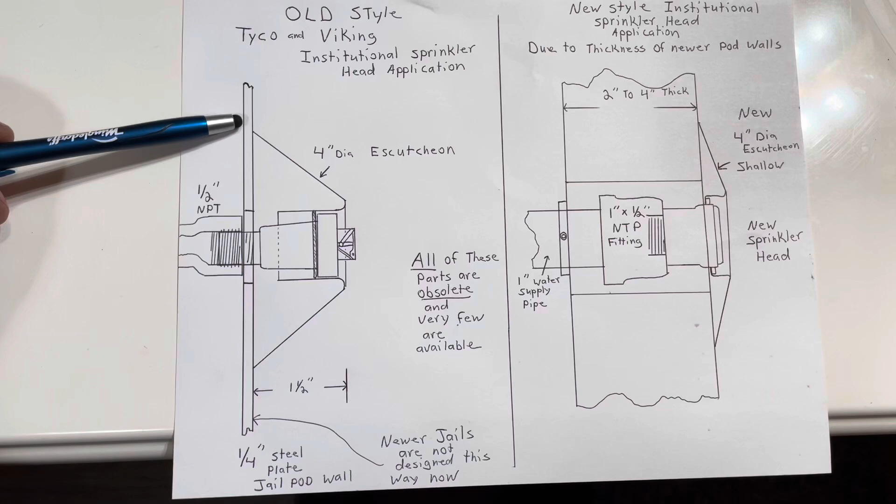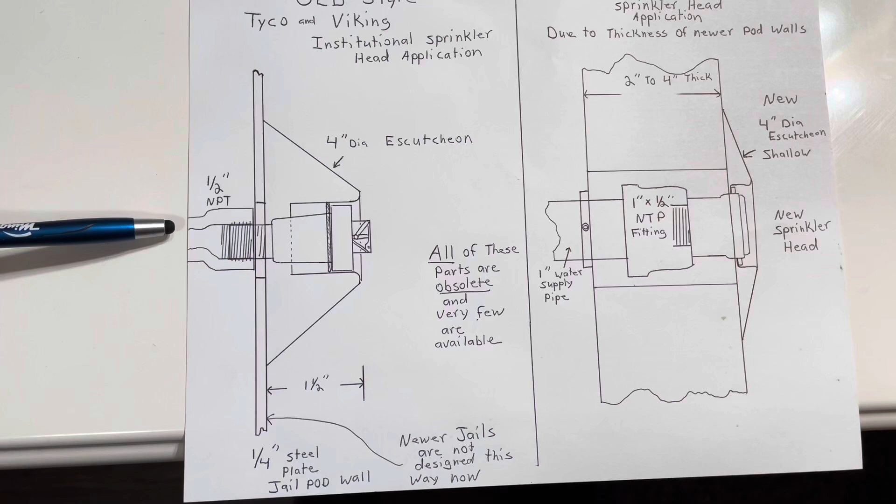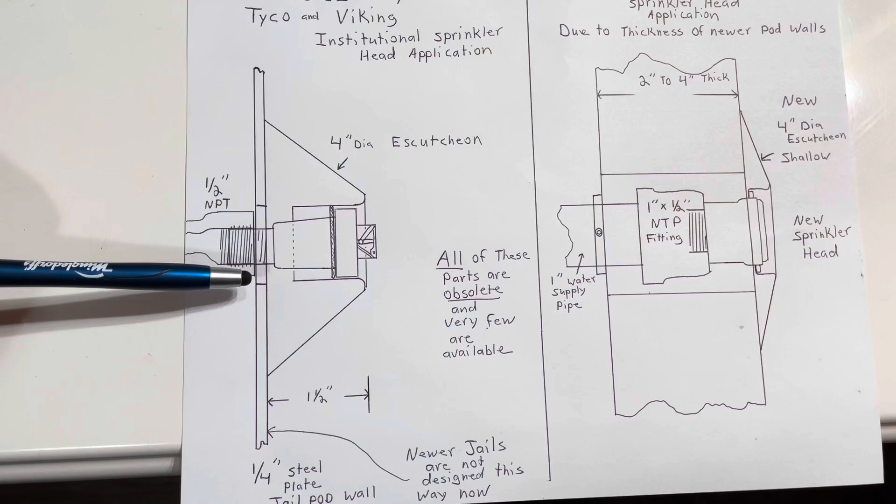So this is the old style, a drawing. The jail cells that I work in have a 1/4 inch thick steel plate, which is ribbed and solid. The 1 inch supply comes in, then goes down to a 1/2 inch national pipe thread, which is flush with the exterior of the wall. And then they all have the sprinkler head and the 4 inch escutcheon, which sticks out 1.5 inches from the wall.

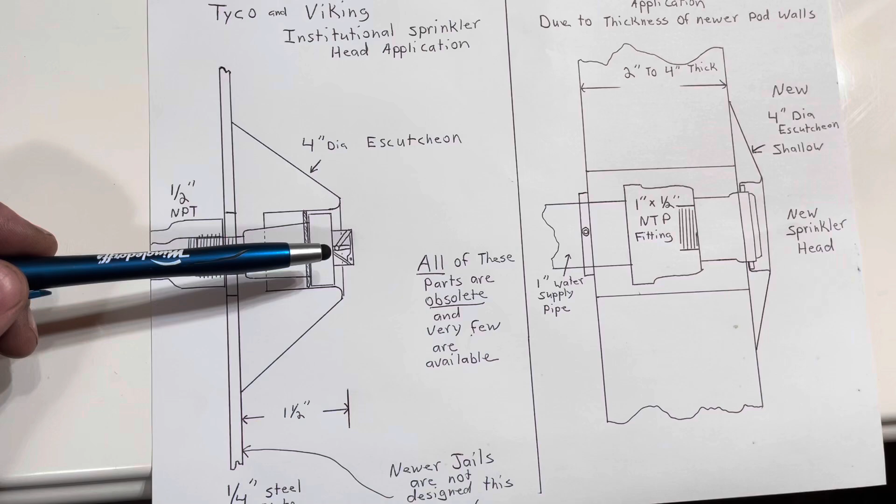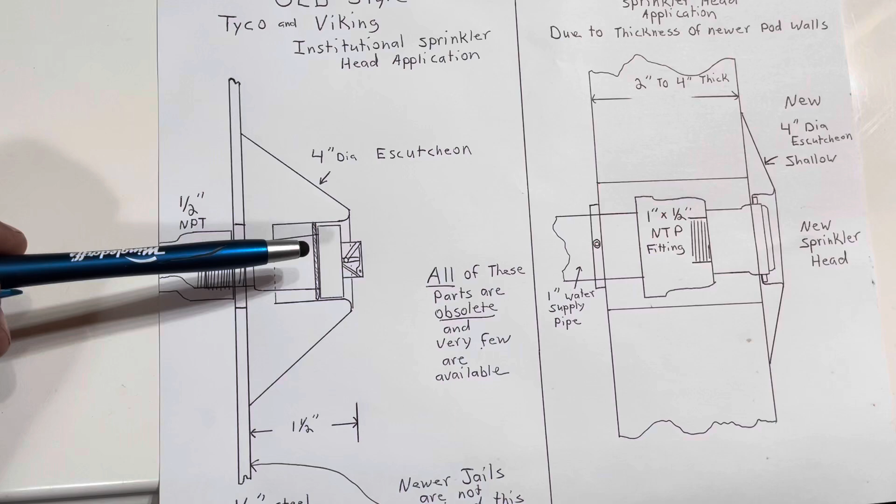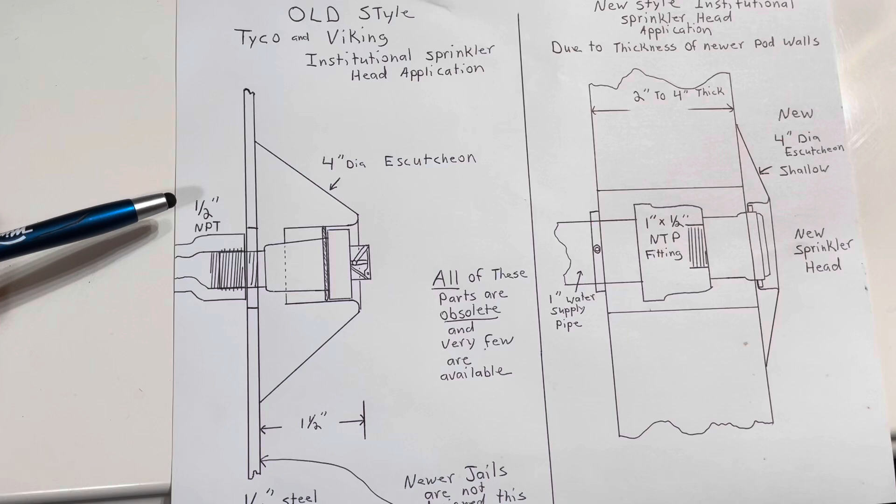So if an inmate busts this sprinkler head and it goes off, our protocol is we shut the water off, back flush the water, take the old sprinkler head off, and put a cap on it temporarily, and then render that cell under maintenance, and no inmates can stay in it until we get a new sprinkler head put in.

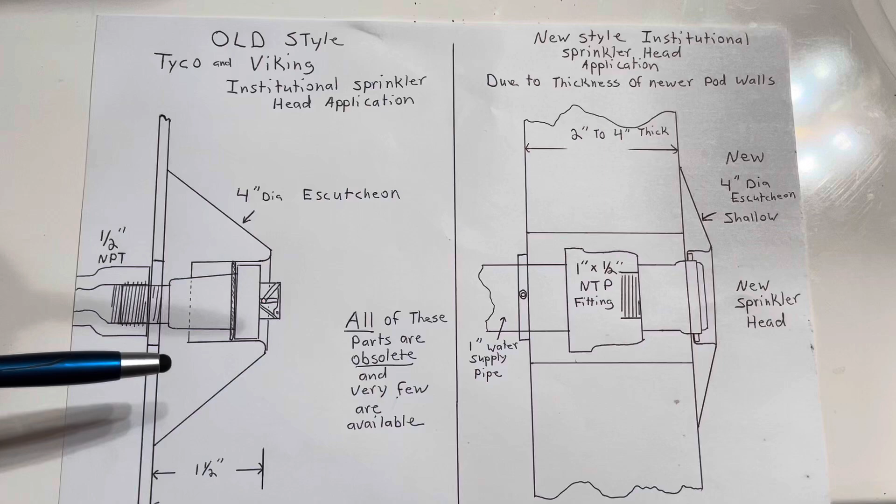The problem is all of the new sprinkler heads are designed differently, and they don't even sell these anymore. There are very few places that even have any on the shelf. I haven't been able to find any lately. So anyway, this is the new one, and the design is for a 2 inch to 4 inch thickness of wall.

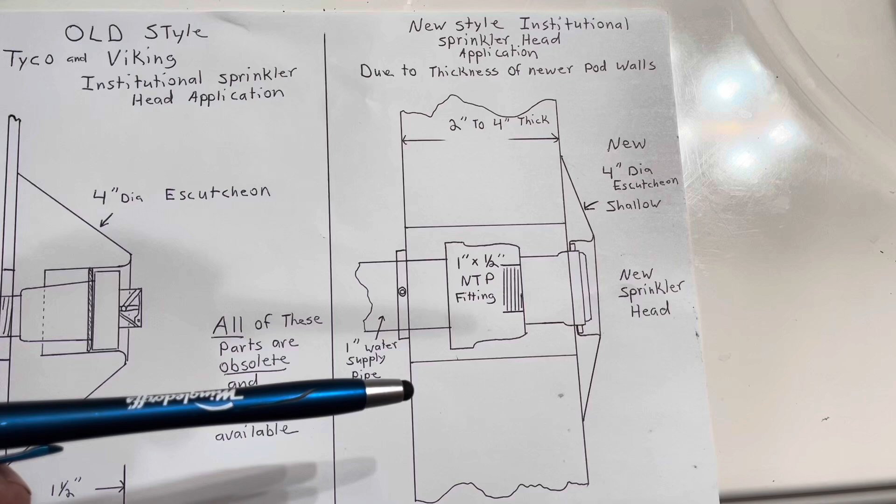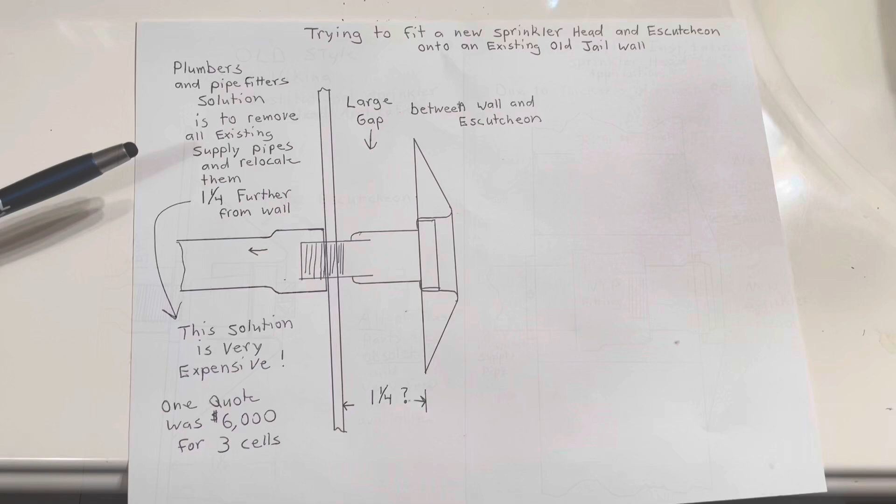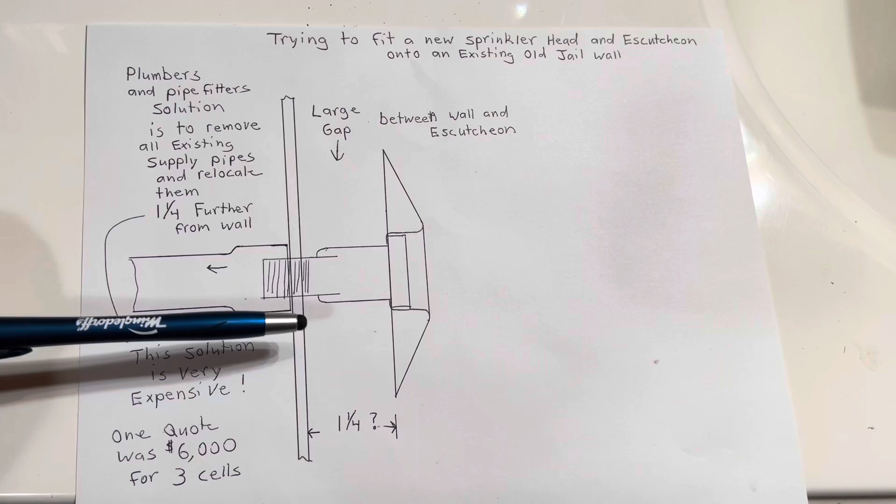When you try to put the new style sprinkler head and escutcheon on an existing wall like this right here, you end up with a 1.25 inch gap between the back side of the escutcheon and the wall, which I guess they call a hanging hazard. They don't want an inmate to put a rope behind it and hang themselves. So that's not acceptable at all.

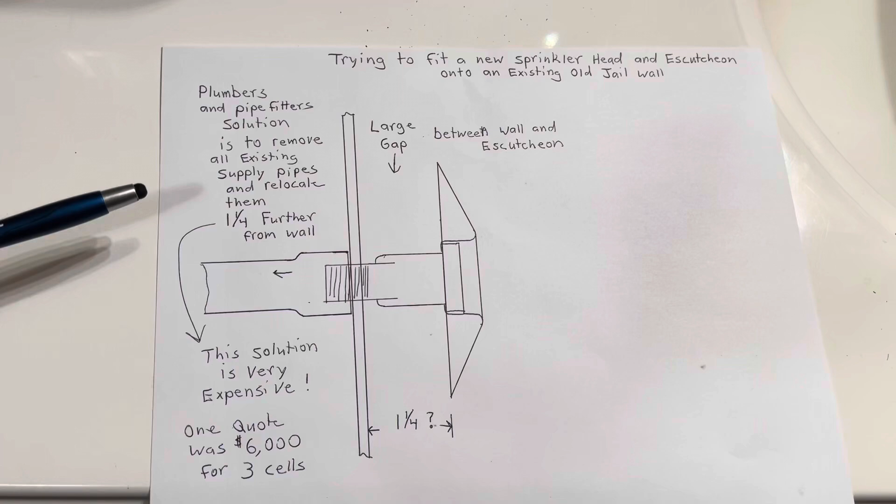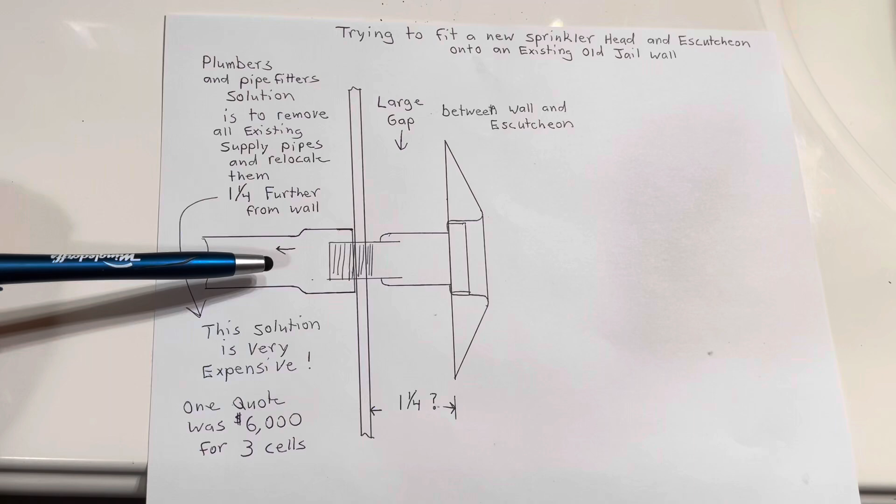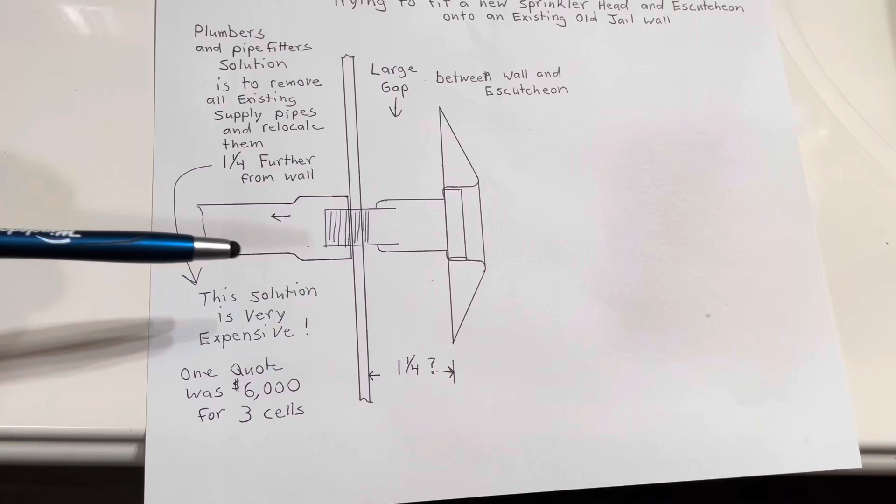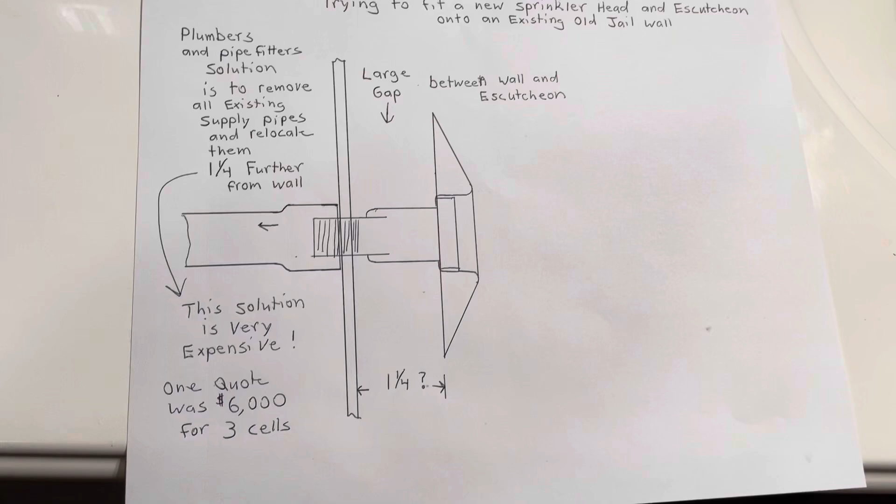The solution that plumbers, pipe fitters and even sprinkler head inspectors have given me would be to remove all of this existing piping and move it back 1.25 inches. They gave me a quote of $6,000 for three jail cells. There are going to be a lot more that we'll have to do in the future. So it's an astronomical amount of money to fix this so the new escutcheons fit flush against the wall. Big problem. And so I have found a very, very inexpensive solution that I will show you guys.

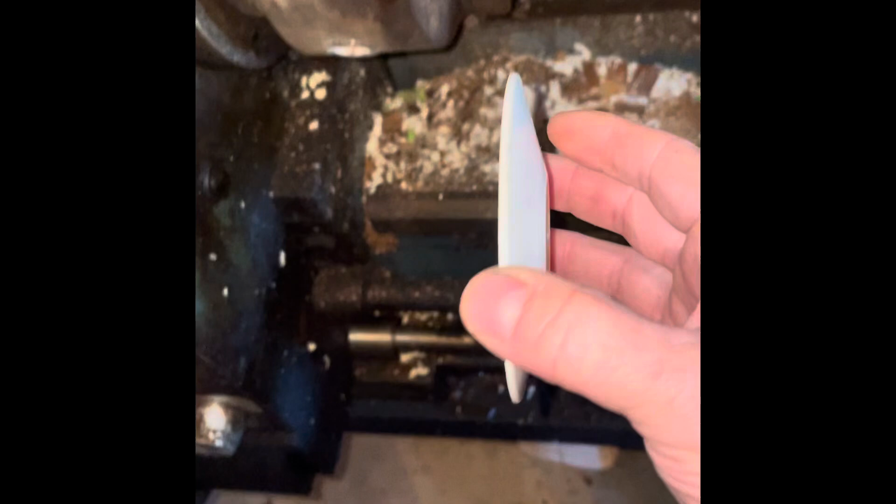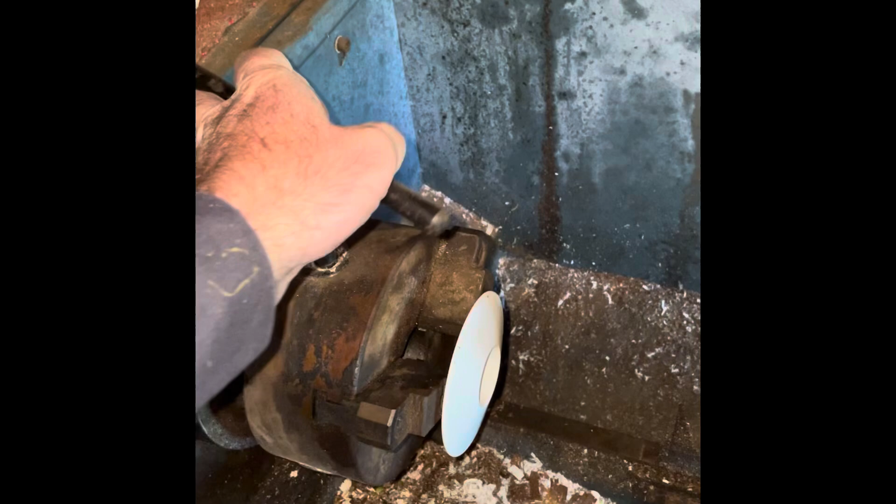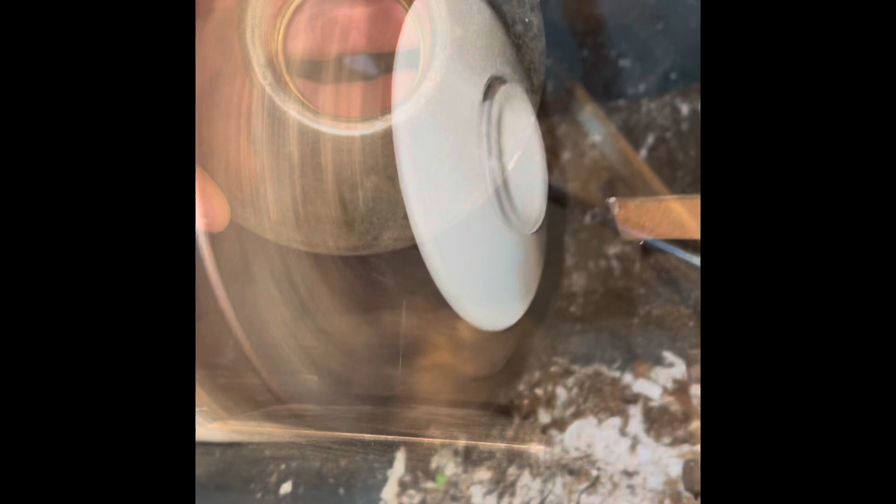The old sprinkler head escutcheon is 1.75 inches. The new escutcheon has to be cut down, so I'm going to chuck it up in my lathe. This new piece will slide directly into the old piece.

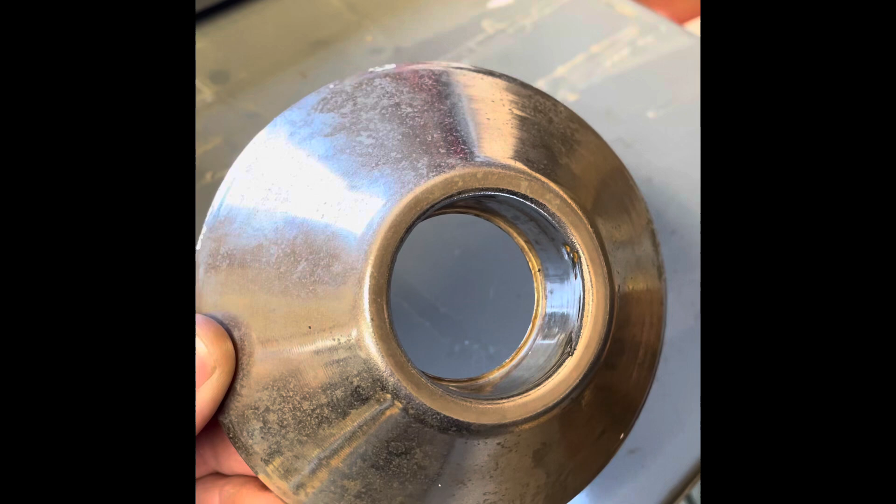This is the old sprinkler head escutcheon. The sprinkler head I don't have anymore. I threw it away, an inmate busted it, so I don't have it as a reference, but it's supposed to fit snugly in that ring, and there would have been a spring inside that would have held it in.

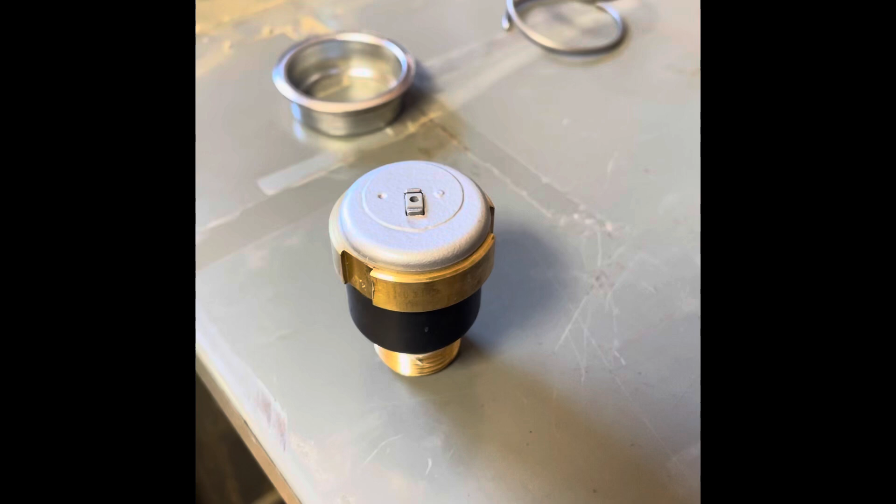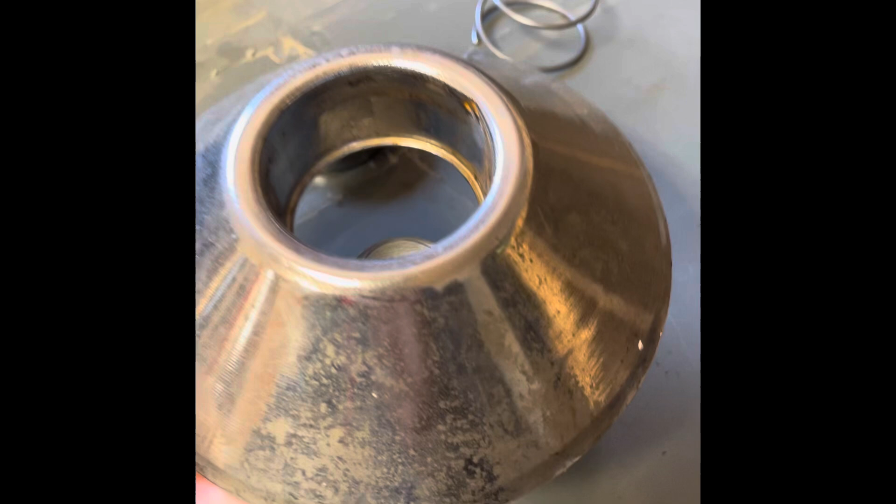The new sprinkler head, this one is a Tyco, and the old ones are Tycos as well, I believe. But anyway, none of the new ones fit. They're a lot smaller, not only in diameter, but they're also the wrong depth. So none of the new ones fit.

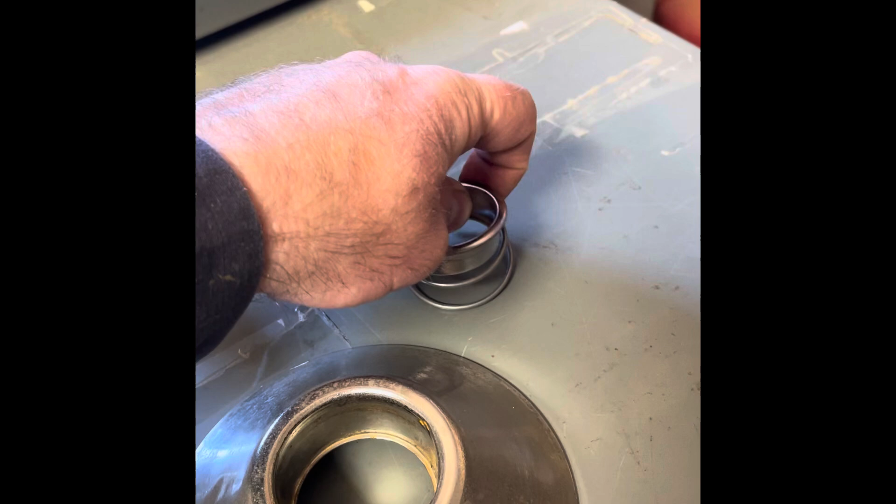The retrofit that I found is this spring and this small escutcheon part, and so the escutcheon fits in here snugly, which fits in here, and then the new sprinkler head fits in perfectly. When it screws in, it should be about right there, right below flush.